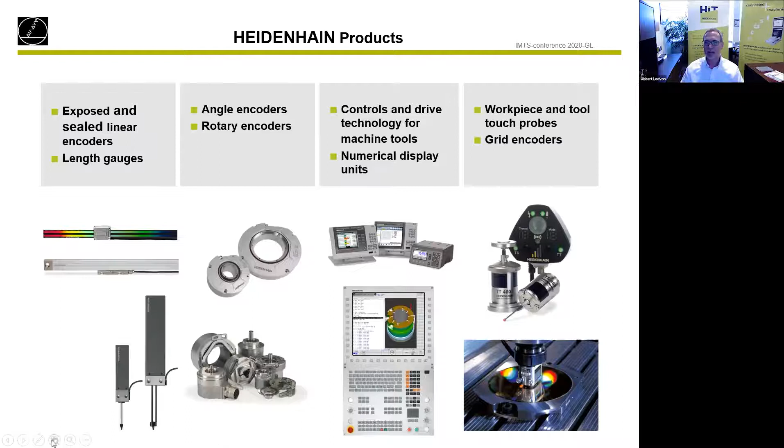And we have some very nice technology on that, where, for example, we have collision protection. Specifically, that's nice for schools. If you use touch probes, the kids maybe hit those, and you don't want to spend $4,000 or $5,000 to replace them. So Heidenhain created collision protection on those touch probes, so they're very popular in schools and some other 5-axis application areas.

A little bit about the control technology. I think that's the big difference between a Heidenhain control and other control systems out there. If you look at 1976, that's when we got into this technology.

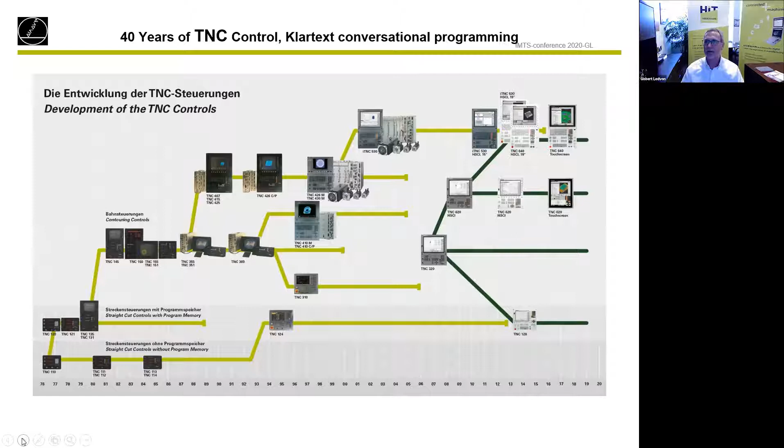This technology was developed in the workshop with the operators, the end users, the student, the tool maker, the machinist kept in mind. And that's how we developed these controls. And that's where you will see also there's a lot of intuitive things on there, what other control systems don't necessarily offer, because they came out of a production environment, what is a completely different approach where you rely more on CAD/CAM technology to drive your motion control.

ACU-RITE is probably known by a lot of you as an American brand, and Heidenhain acquired ACU-RITE, I think, in the late 80s. And we're producing the ACU-RITE CNC control right here in Schaumburg, where I'm located. And we're proud to do that as an American product. You don't have that many control systems made in the United States anymore.

From a support point of view, we are located all over North America, starting all the way in the north in Ontario, Canada. Chicago is the headquarters for the Midwest. And then we have our second headquarters in San Jose, where we're focusing more on the semiconductor business industry. And then, of course, Mexico, where we also have a location for customer service and sales.

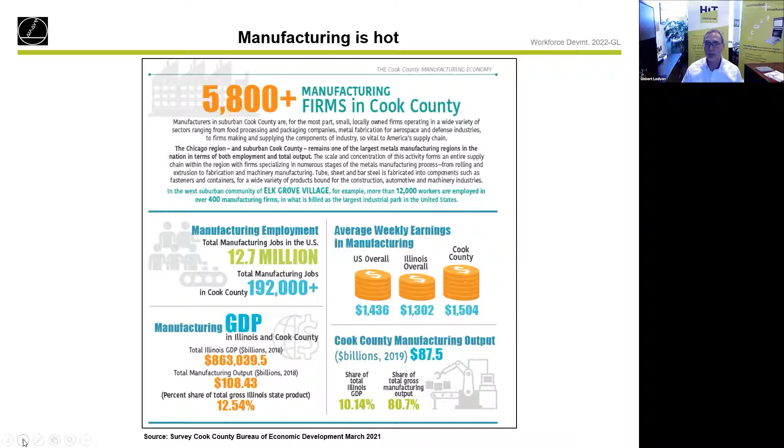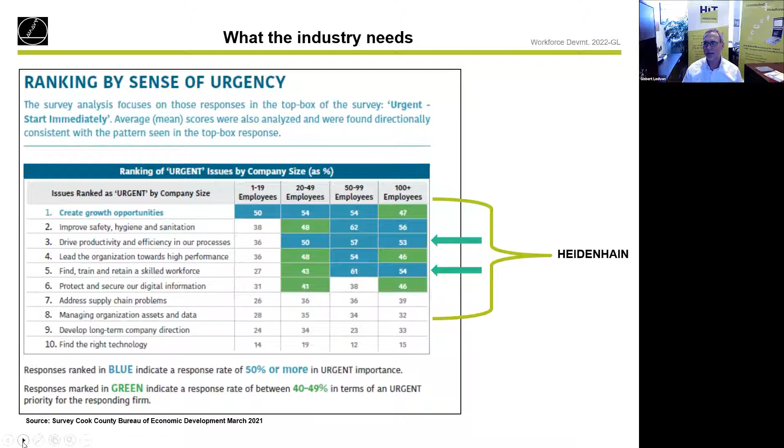And as you can see, number 5, clearly they can't find and keep the skilled workforce. So that's something we'll certainly talk about in the next couple of minutes. Because if you dig a little bit deeper into this situation, what the industry is facing is finding and keeping skilled professional CNC operators. I don't call them blue-collar people because they really have to be highly skilled in order to operate a $500,000, $600,000, $700,000, $800,000, $1 million machine tool. So to just call them operators or blue-collar people, I don't think is really fair, because these are really skilled professional people.

So you want to make sure they go into an environment where they're excited, in your school, but also at the shop. They want some empowerment. These new generations, they want to have some input. They don't want to just take a CNC program, push a button, and cut a part. And they also want to see a career path. What does it take me to get from an operator to a programmer to maybe a supervisor or a manager?

The global and the domestic competition is more and more critical in our industry. So we need to add value. We need to do things differently. It doesn't help us to educate operators on 3-axis machines when the industry is looking for people who need 5-axis experience. So we need to think about those trends, so we're educating the right team of people, so the industry really will go to your school to look for those people. And certainly we will need to optimize our cost.

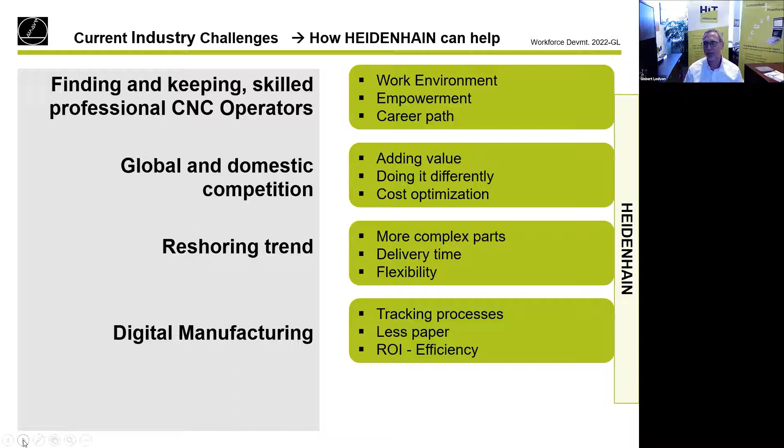And then certainly digital manufacturing is becoming a big issue, or a big challenge in the industry. Everybody needs to track processes, specifically the medical, aerospace, automotive industry, less paper. So you want to electronically put information back and forth between your machine control, and you want to be very efficient in order to get a big ROI, or fast ROI, of your investment.

And then the flexibility in the manufacturing process. Like I pointed out before, small lot sizes are important. You want to make sure that first part is coming off the machine perfect. You want to have in-process inspection capability. So the kids have to learn how to use a touch probe to measure a part maybe on the machine before it goes to a CMM, so it can be remachined before you take it off the machine if there's one dimension out of tolerance.

And you want to have flexibility and give this empowerment to the kids so they can program also on the machine, so they can make a part and really machine it right there and then, so they feel that they accomplished something. So keep all that in mind when you make your next investment and utilize your next training tool.

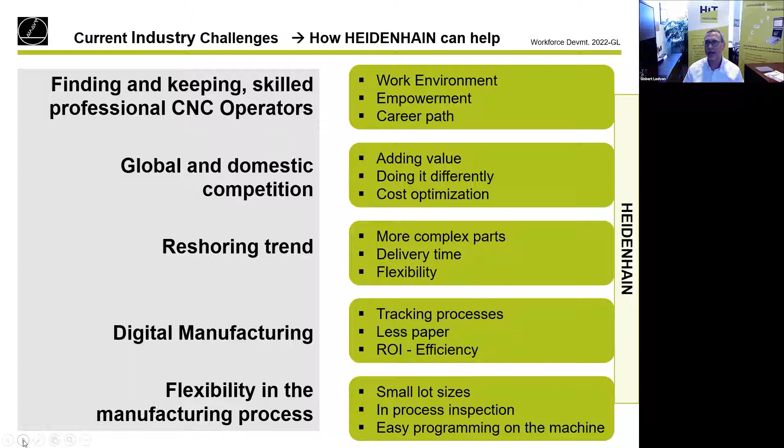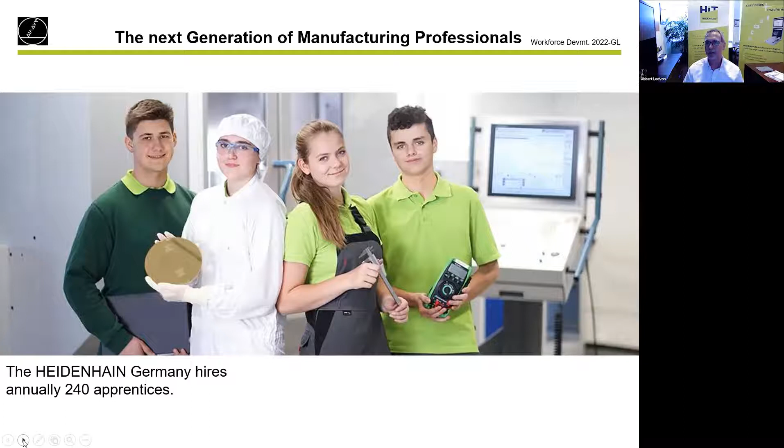So let's step a little bit back. As I said before, not every school has a big budget to put a 5-axis machine into their shop to get really the highest level of manufacturing technology into their school.

What we have from a Heidenhain perspective, together with ACU-RITE, we can help you to equip your manual machines with digital readout solutions. We can upgrade your old Bridgeport machine to become a full-blown CNC, because we convert those machines by replacing ball screws and motors on those axes to become a CNC. And with the conversational language we have on these controls, it's very easy for the students to learn on a manual machine to run a CNC program.

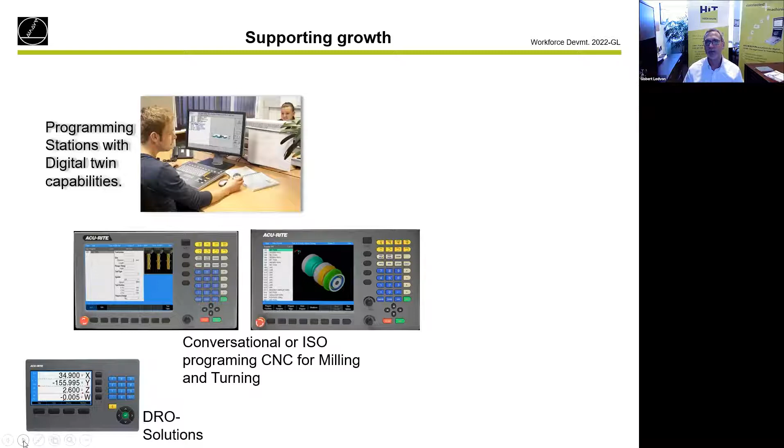The next level we offer is programming stations with digital twin capabilities, so for the next level of your students to get into full CNC technology, maybe high speed 5-axis. And of course, if you want to get into mill turn applications, we offer solutions for these high-end machines where you have multiple functionality, not only milling, but also turning.

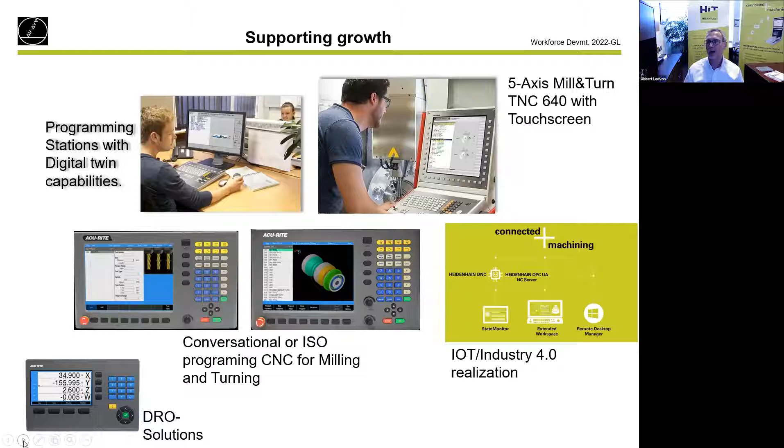And then to connect everything, we also can help you with what we call our connected machining solution, or the digital manufacturing shop floor, where we have technology and software where you can monitor machines, you can monitor jobs, you can prepare jobs, and we can put that all together. And we help you to also teach kids at early stages to learn about Industry 4.0, so when they go out in the industry, they know what this all means.

So you're not going to be alone. We have a lot of people here to support you. This is my team. We have application engineers, we have business development people, we have teachers to help you or your staff to basically learn all this, and we can help you with getting into that.

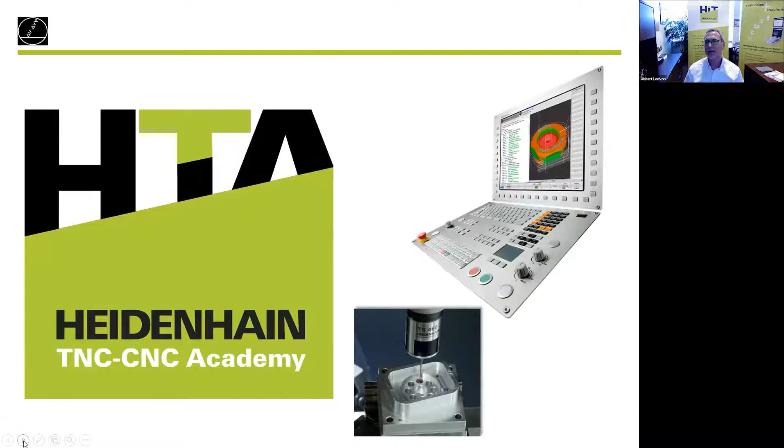So one thing I really want to spend some time on is the Heidenhain Training Academy, or what we call now the Heidenhain Technical Academy. This is something you could become part of, and I'm going to cover all these 3 stages, but one is the top one on the top right here. What is the Heidenhain Training Partner?

So we have some schools now teaming up with us, and they become a Heidenhain Training Partner. So we're certifying their staff to be able to train on Heidenhain controls and helping the local industry to get their next generation operators trained, and make some money, because they charge them for the training, and it's all their income if they want to use that.

But there's one thing that is really inexpensive and very powerful as a training tool, what we call the Heidenhain Interactive Training. I'm going to go quickly through this software and give you a demonstration. It's basically developed by Heidenhain, based on a Moodle platform, which is widely used in a lot of universities.

You can easily operate and learn the basics of CNC, not necessarily only about Heidenhain, but also self-study. There's also testing involved in these training modules for your students, if you like.

It runs on HTML5, very simple. You just need a browser - Edge, Chrome, Firefox, Safari. It runs on mobile devices too, and it's very fast, nicely programmed, very interactive.

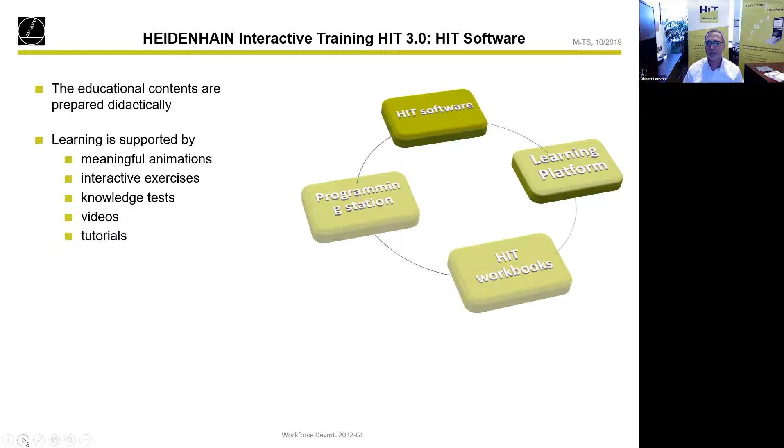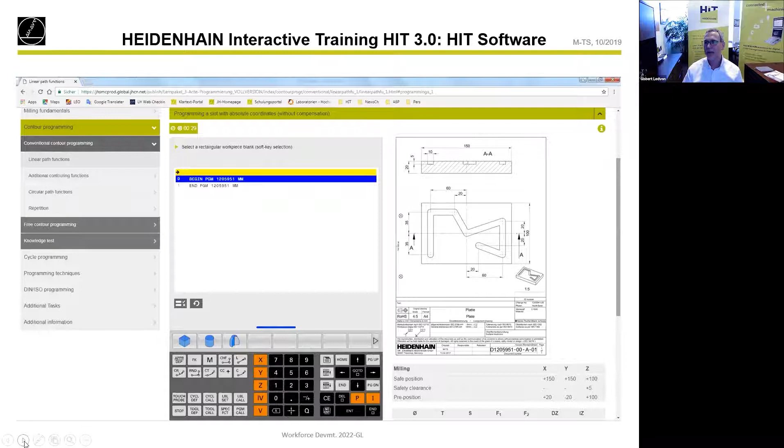The content is prepared by us, and there's videos, tutorials, animations, which I'll show you later. There's also capability to bring up a print to program right on the system, with either the Heidenhain programming language or ISO programming language, whatever you prefer. We can do both, and the student can practice programming, then simulate on the programming station what he just programmed to see that live.

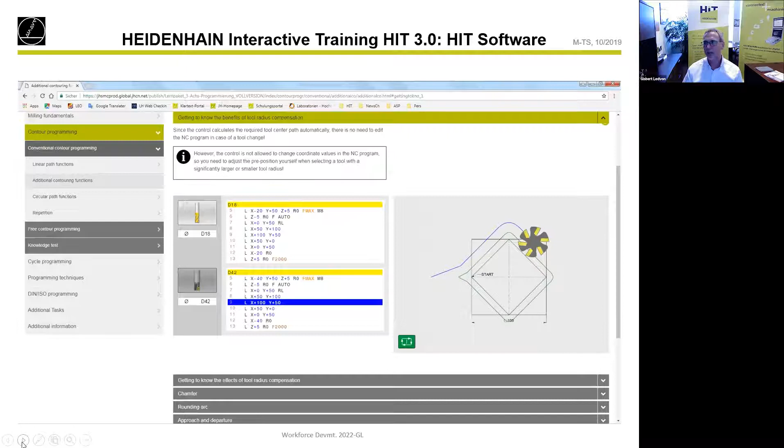We can also bring up a real control. That means this is how you would see it on a full-blown $500,000-$600,000 5-axis machine. The control can be brought up, and you can do a 3D simulation. So when you do more complex parts, you can avoid any type of collision or mistakes you might make in the programming.

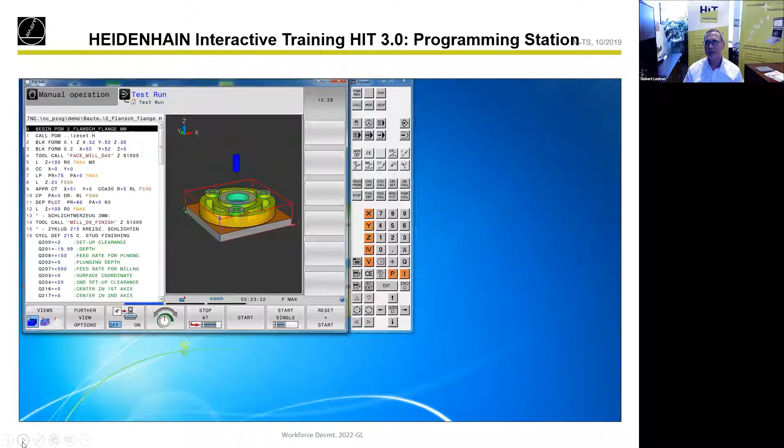That also comes with this Heidenhain Interactive Training keyboard. It's a real keyboard like you would have on the machine, with all the buttons, all the functionality keys, ergonomically nice, sitting right on your desk, nothing vertical. It's really ergonomically designed, so students can sit at the desk, connect a screen and a computer, and get a full-blown CNC simulation and programming station.

So why would you use this? There's no license cost because it's an open source technology. You're basically buying the software license from us, and then you can renew this. There's also a free demo version, and it's really easy to configure.

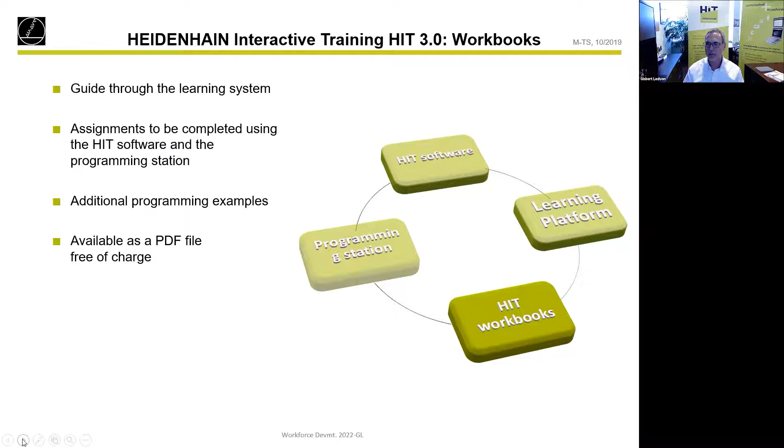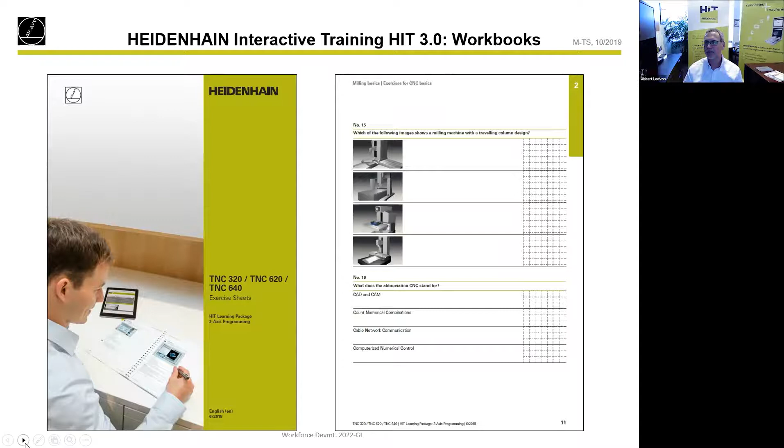The system is self-guided. There are programming examples in there, and you also get a PDF file you can download and print as a book if you'd like. This is how that would look - interactive workbooks with screenshots, also for testing and exercises, questionnaires and pictures included, drawings with dimensions. So it's all basically in there.

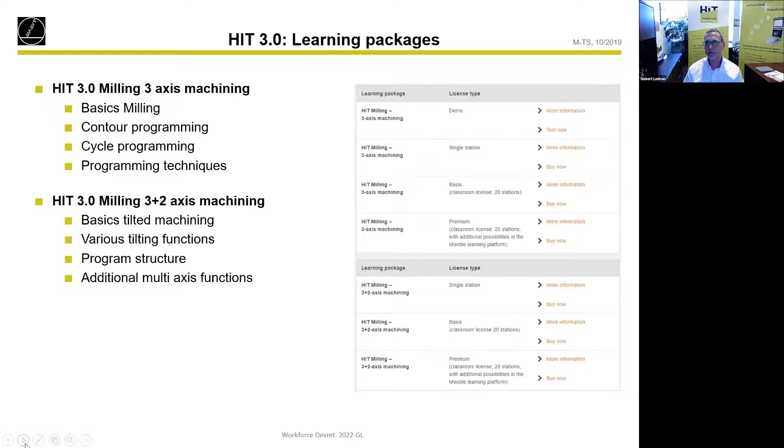So you can get this for 3-axis milling, 3+2-axis milling. You can get it for turning applications, and you can get it for English, French, Italian, Korean, Dutch, Polish, Portuguese, Russian, and Spanish, of course.

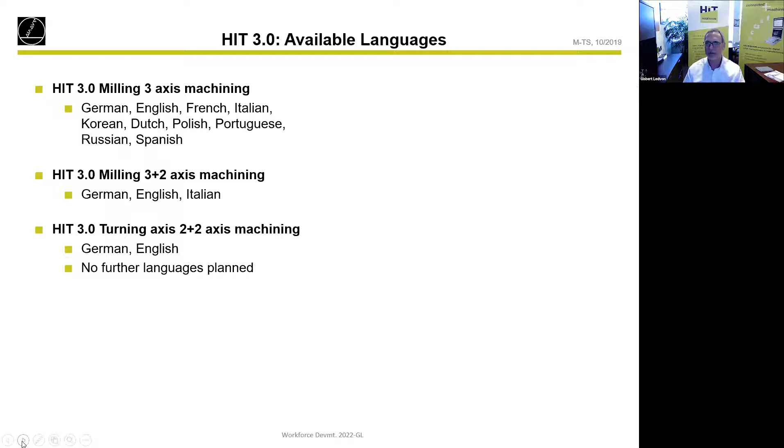So if you have students from foreign countries coming here wanting to become professional machine operators, you can just switch to their language and they can continue in their own language to understand the process better and learn quicker. But then it's not available when it gets to more complex stuff - we're stopping at German and English, because I think once the fundamentals are done, you can jump on from there.

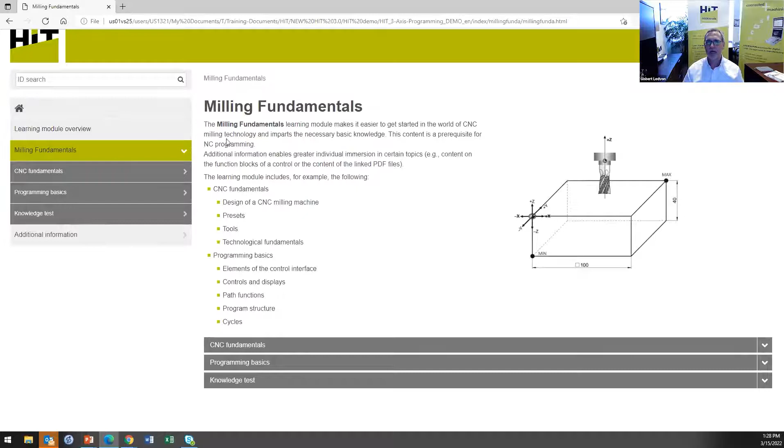So I want to give you a very quick demonstration of the software. I just brought this up in my browser here. You're basically guided through this - CNC fundamentals. If I click on this, I can see what a coordinate system looks like.

I can click on that, look through that, and get the understanding of a coordinate system. There's movies and animations in here. So for example, if I explain what is an X, Y, Z axis, I can let that video run and have a better understanding.

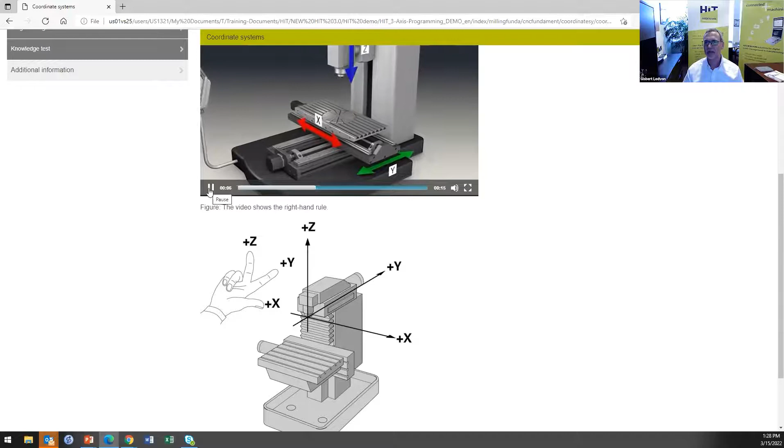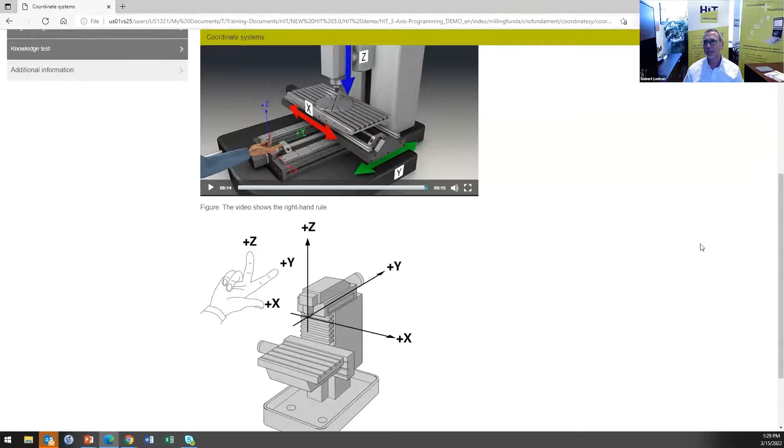We're also explaining what we call the right-hand rule, so everybody knows what is X, what is Y, and what is Z. It's very easy to remember, and it's a good tool for students to use their own right hand to remember these functionalities, then go into the next section to talk about 5-axis.

You can also go into machine axis again in here, where we go through the different configurations of what type of machines are out there. It's a very useful tool to explain to students what are different machine components, what different machines look like. You can explain the different functionality, how guideways are set up, and what are the advantages or disadvantages of different technologies.

Another way is what type of milling machines are out there, like horizontal, vertical, multi-axis, 5-axis, and so forth. So every individual concept in kinematics is explained, and that's something the kids will learn.

We also go into technology fundamentals - what is a machine tool, what is a coordinate system, what is climb milling, for example. Explanations to cover all that.

What is the advantage? What are the disadvantages? It not only has to do with HEIDENHAIN technology or training people to learn HEIDENHAIN controls, it has to do also with fundamentals. At the end, when they're going through the course, there is a knowledge test.

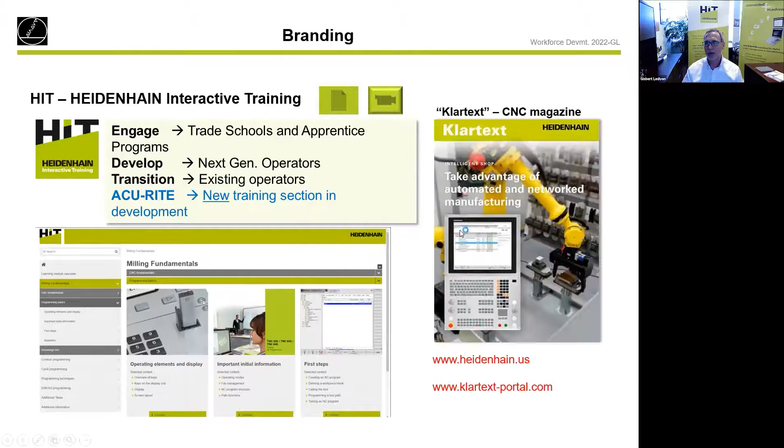So I encourage you to go on the HEIDENHAIN website. You can download the free demo version on that if you're interested, and you'll find some more information on the website on that.

It's very cost effective. It's available in different languages. No installation really necessary, it runs standard on the web browser. Easy to use in the classroom license. You as a teacher can also add your own content if you like to do that, so you're staying on the same platform to teach your kids. Maybe your own material can easily be integrated into the HIT platform.

And you can use this as a programming station and demonstration. So when you decide to go into that direction, we will support you here with our own training center. As you can see here, we could teach your staff, whoever wants to learn more about this technology. You could get these same simulators in your school, and we have special programs for that. I will show you that.

We also have what we call the Applied Technology Center set up here with multiple 5-axis machines. As you can see here, there's a Kern machine - it's the top of the line 5-axis machine you probably can buy in the market, with the highest precision and highest speeds and feeds - all the way down to a 3-axis simpler DMG machine, or here a high-performance Hermle 5-axis machine. We have preset stations, so we can teach you and your students, if you want to bring them in to us, what the technology is all about.

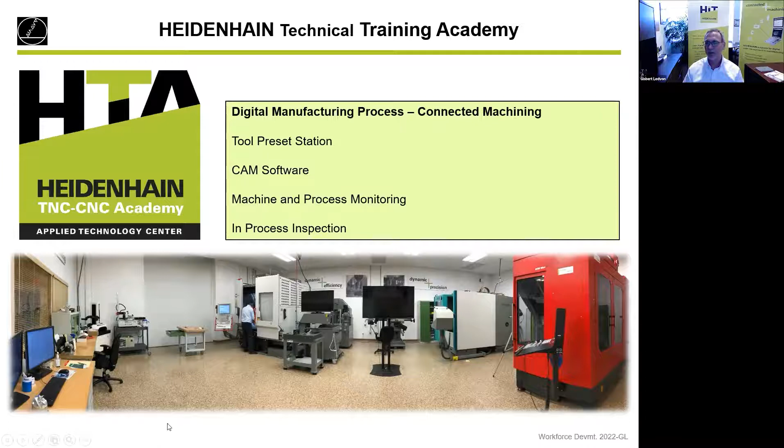What we also do is workshops. So if you ever think your school wants to attract more people, bring parents in to get them excited about this technology, we're offering workshops, we're organizing invitations, we're inviting some of our partners from the CAM side, from the machine tool side, and we can do presentations for you at your facility to open up the school for you.

Their teachers are certified - we certify them every 2 years, so we make sure they're staying on the latest technology, latest software version. And they're offering on their website now HEIDENHAIN training, so they're generating some additional revenue, and they're also offering now a full-blown apprentice program in the Denver area.

So some of the machine tool builders like that, because now they can send even their own customers and operators to the school, and they can get trained there, at least on the basics, so that they can operate their machines sufficiently. So it's a really good solution for the school and for us and for machine tool builders, because it's a really great resource, and we're teaching them the stuff the industry needs.

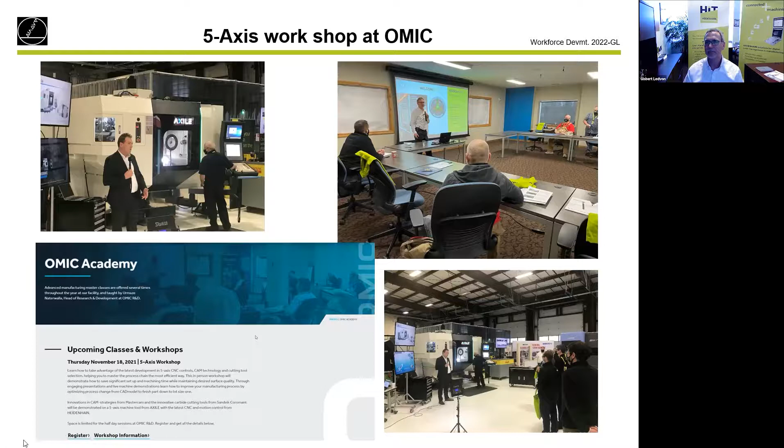One thing is probably interesting for you - we just launched what we call the HEIDENHAIN Educational Support Program. And many people don't know this, but HEIDENHAIN in Germany is a foundation.

That's good from a business point of view, because we don't really have to listen to the stock market or to any analysts to tell us what to do next. HEIDENHAIN's management and the directors decide what they see as a vision on technology, what is needed in the industry, and that's what we're developing. We're basically reinvesting a lot of the revenue of the sales back into research and development, what is really top within the industry, because we don't have to report to shareholders, and therefore we can always be a little bit more adventurous to develop something new and more innovative than maybe some other industry competitors, for example.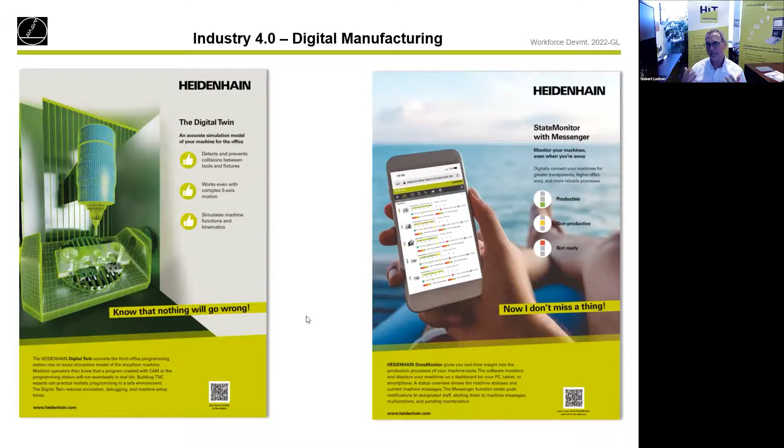We also provide you with these posters, so you can set up your training room with some information about the digital twin and monitoring software. Those posters are provided, and here we have something about collision protection. So we help you make your classrooms look very innovative, high-end, high-tech, and we give you the tools to fulfill that promise.

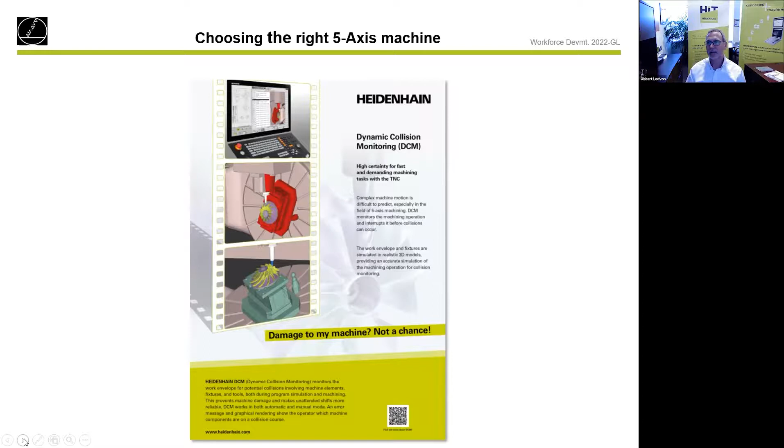So quickly to summarize, why Heidenhain for schools? We always have innovative teaching tools based on the Moodle platform. The curriculum is ready to go. We have animations, we have testing tools for you. We can provide PDF files you can print out. We have technology for every training level, from ACU-RITE all the way to Heidenhain 5-axis.

We can go and provide solutions for your entry-level machine tool, maybe help you with upgrades. We have special school pricing on that. And we can also make connections with some of our big machine tool builders who offer Heidenhain controls and work with schools to give you specific school pricing on their equipment.

We always will support your team, train your faculty, making sure they're staying sharp and on the cutting edge. And we would also help you, like we did with Denver Community College, to communicate and have marketing campaigns and talk about what schools are available to promote and show Heidenhain controls and who could teach on Heidenhain control technology, which is really becoming the new standard in 5-axis now in the United States more and more.